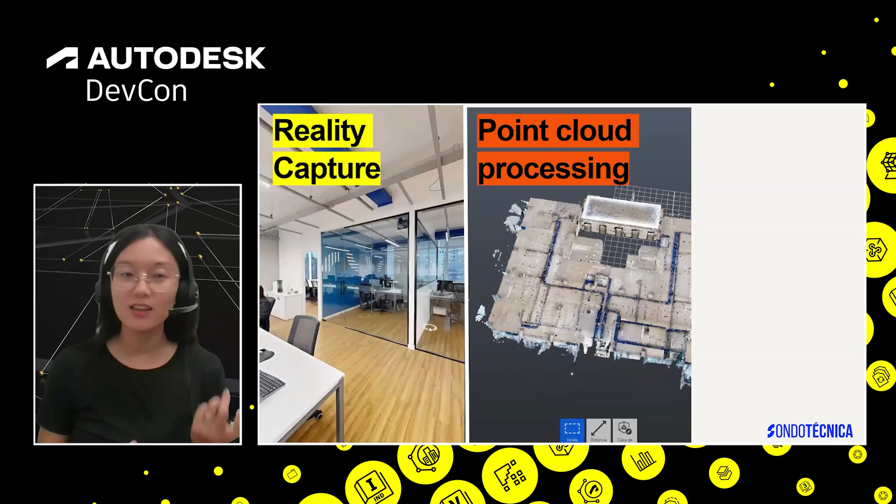Then the point cloud was cleaned, optimized, and classified to identify architectural and asset elements. Finally, we developed a BIM model from the point cloud, modeling all building elements and adding asset attributes and semantic information.

Second, we collect data related to indoor environmental quality and asset management. To do this, we installed a noise sensor, temperature and humidity sensor, energy consumption sensor, and cameras throughout the environment. They send information packets in JSON containing fields such as ID, timestamp, temperature, humidity, among others, to an IoT Gateway. This gateway is responsible for locally processing the data. It's built with a Raspberry Pi board.

In addition, 2 cameras were installed in strategic spots in the office to count people in real time. The AI model used is YOLO AI. The system records the highest number of people detected and calculates the average confidence level for the detection. The results include the camera ID, timestamp, location, number of people detected, AI model, and method used, and are sent to the Gateway.

After receiving the data, the IoT Gateway sends the data via HTTP request to the API, hosted on Microsoft Azure. A TypeScript code developed by Sondotécnica receives, processes, and stores the sensor data. Each sensor or camera is identified by 2 main keys that facilitate organization and visualization in Autodesk Tandem and in the database: a MAC address, which ensures the unique hardware identification, and a unique name to identify the device.

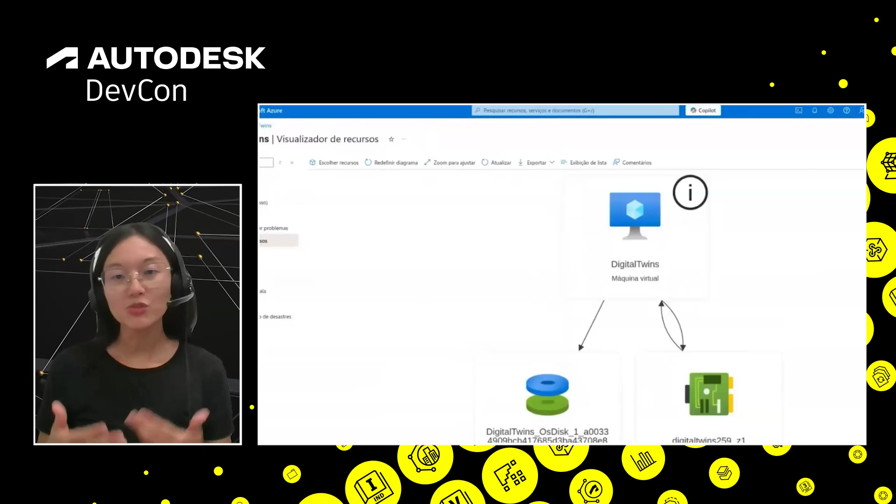The payload then follows 2 simultaneous flows. First, the data is stored in the PostgreSQL database within Azure. And second, it's sent to Autodesk Tandem, linking it to the TechLab Office digital twin.

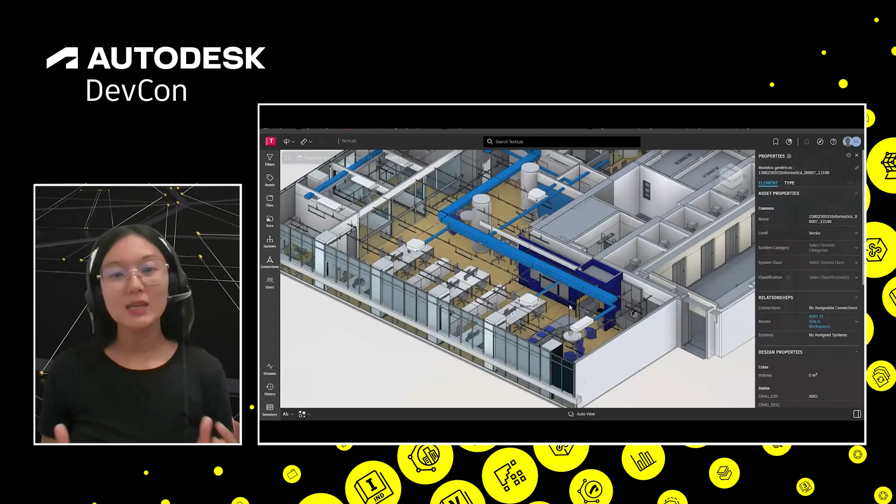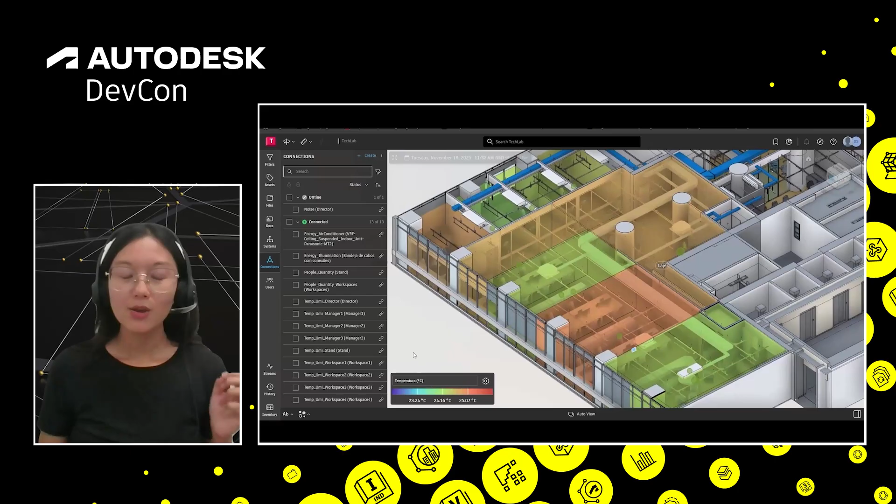Additionally, the platform can showcase heatmaps and charts, which aid to analyze and monitor environmental conditions. You can see the dashboard to view the BIM model, real-time data, compare temperature and humidity across different areas, and access detailed historical data for improving monitoring and traceability.

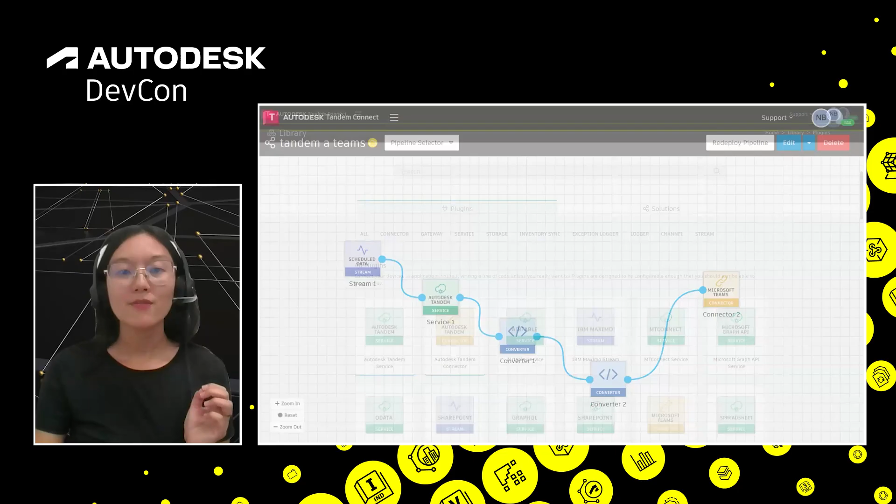And finally, we'll show you how to configure Autodesk Tandem Connect to send automatic notifications via Microsoft Teams. To connect Tandem to Teams, we used 5 plugins in Autodesk Tandem Connect. The first is the scheduled data stream, which runs the pipeline every 2 minutes. The second is the Autodesk Tandem Service plugin, which connects directly to the digital twin.

We used the option Retrieve Stream Time Series Data to bring in the sensor history, and after we used 2 converters. The first converter filters the data, keeping only the last 5 minutes of temperature readings. A second converter sets the alert rules, like the maximum temperature and the message that will be sent.

Finally, the Microsoft Teams plugin sends the alert messages to a channel. We just pass the webhook URL from Teams to Tandem Connect, and the alerts are sent automatically. After configuring everything, you can receive alerts directly in Teams, and also see temperature differences in Tandem and on the dashboard. This allows real-time visualization of the collected data.

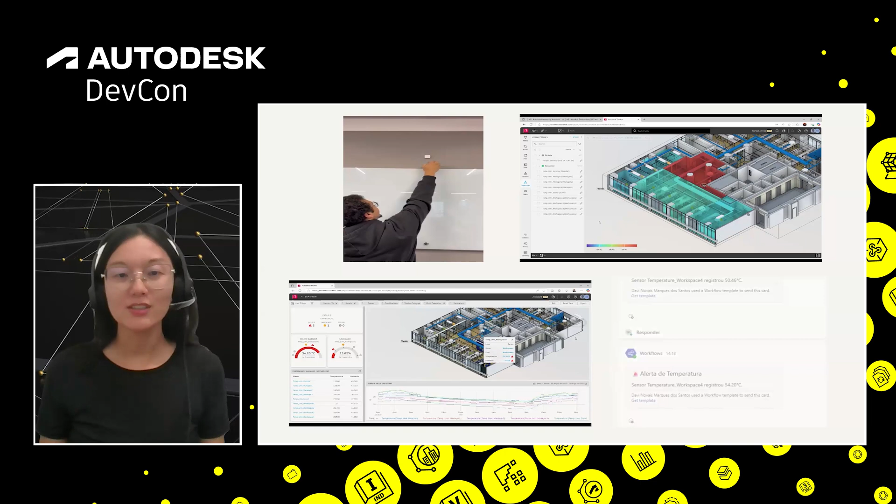So, when a sensor detects a temperature above normal, the change appears in the digital twin and on the dashboard, and an alert message is sent directly to Teams. In short, the architecture of the digital twin system consists of 4 layers. The perception layer focuses on data collection, includes actuators, sensors, and communication components.

The data layer involves cloud storage, which holds the BIM model and the data collected from the sensors. The service layer embraces analysis services, where artificial intelligence algorithms process and analyze the data. Finally, the application layer provides you real-time data visualization within the Autodesk Tandem's environment and sends notifications via Microsoft Teams from Autodesk Tandem Connect.

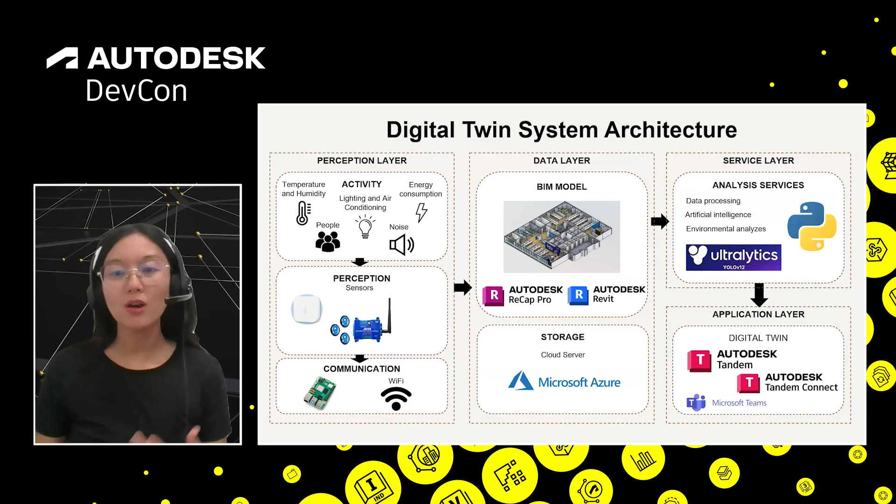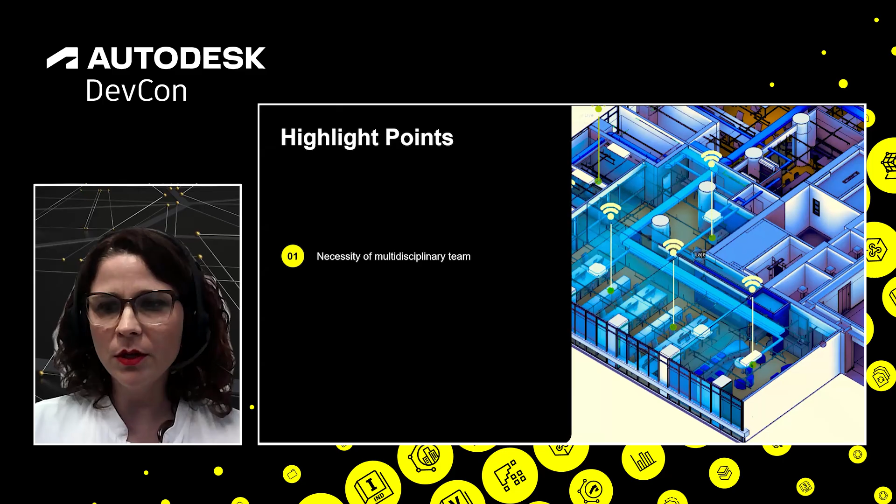To conclude, I would like to highlight 5 key points. First, the necessity of a multidisciplinary team. Building an intelligent digital twin isn't just a technical challenge. It requires collaboration between architects, software developers, data engineers, and operations professionals. Integration only works when diverse expertise come together.

Second, this is a low-cost and scalable solution. By using IoT sensors, edge processing, and Autodesk Platform Services, we built a robust architecture without heavy infrastructure investments. The intelligence comes from smart integration, not from expensive hardware.

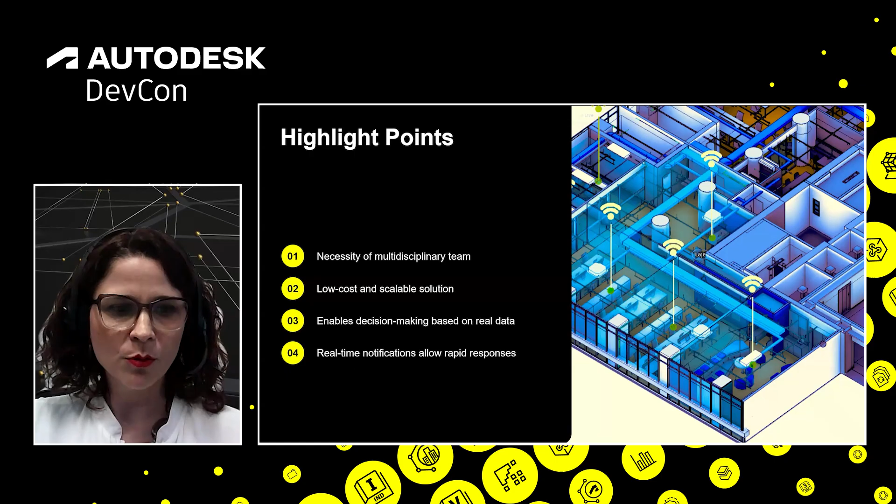Third, the solution enables data-driven decision-making. Instead of relying on assumptions, facility managers can act based on live environmental and occupancy data directly connected to the digital twin. Fourth, real-time notifications enable rapid response. Through automated workflows, alerts trigger immediately when thresholds are exceeded, reducing response time and preventing operational issues before they escalate.

Fifth, this is just the beginning. The next step is expanding monitoring to incorporate additional variables such as energy consumption, water usage, and predictive analytics, moving toward a more autonomous and intelligent building ecosystem. Ultimately, the digital twin is no longer just a model. It becomes a powerful decision support system.